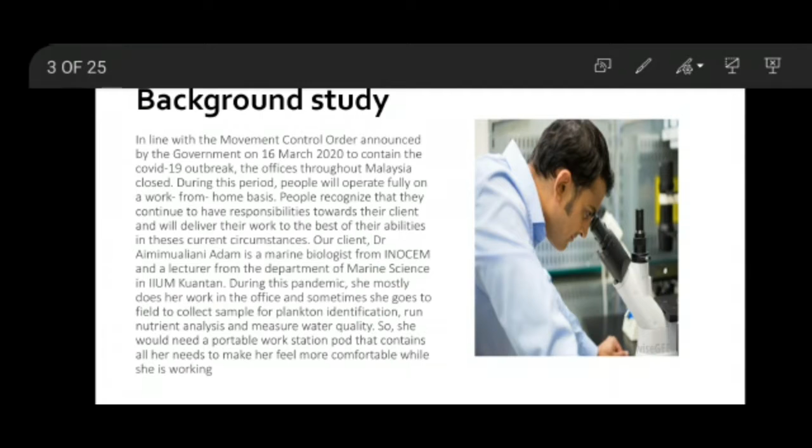In these current circumstances, our client, Dr. Aimimualiani Adam, who is a marine biologist from INOCEM and also a lecturer from the Department of Marine Science in IIUM Kuantan, has two types of workplace: one from home and the other on the field. On the field, she goes to collect samples for plankton identification, run nutrient analysis, and measure water quality. So she would need a portable workstation pod that contains all her needs to make her feel more comfortable while she is working.

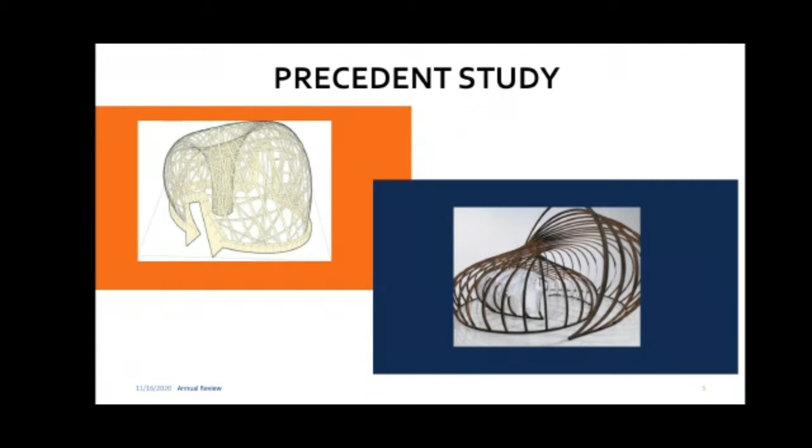Now let's dive into our pod design. For our precedent study, we chose this because the exterior is similar to our design, and for our case study, we chose this because the mechanism of our pod also needs to be portable. So we chose a caravan-like design that can also extend, like the one on the right.

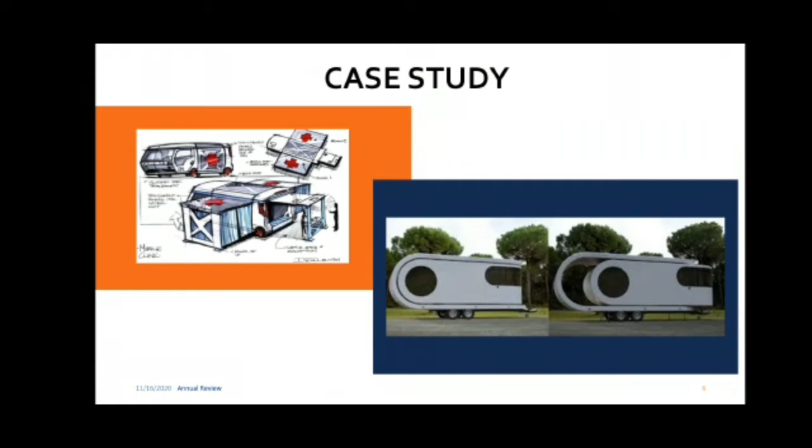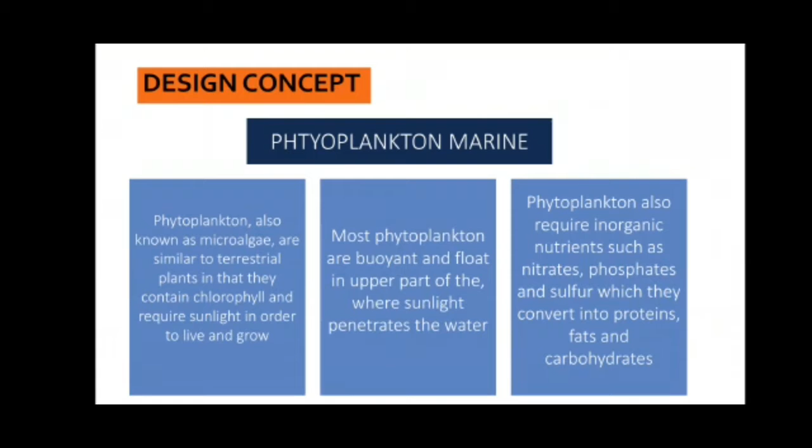Now moving on to our design concept, which is phytoplankton marine. Phytoplankton, also known as microalgae, are similar to terrestrial plants in that they contain chlorophyll and require sunlight in order to live and grow. Most phytoplankton are buoyant and float in the upper part of the water where sunlight penetrates. Phytoplankton also require inorganic nutrients such as nitrates, phosphates, and sulfur, which they convert into proteins, fats, and carbohydrates.

Moving on to the design development, we started off at the top right corner, very basic and geometric, and it slowly turns into a more round shape model.

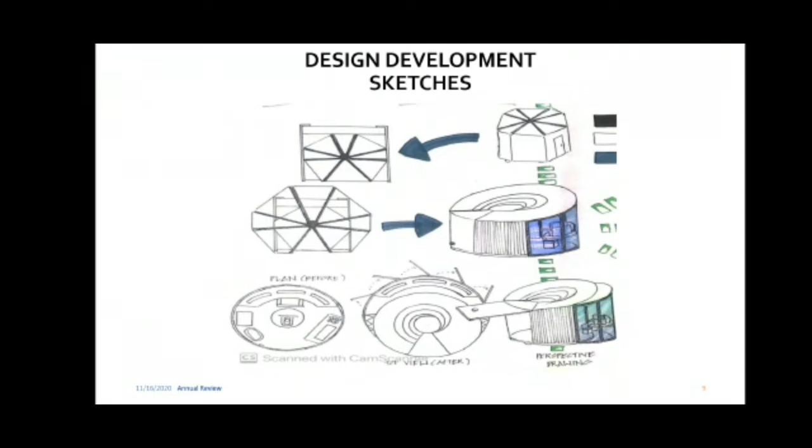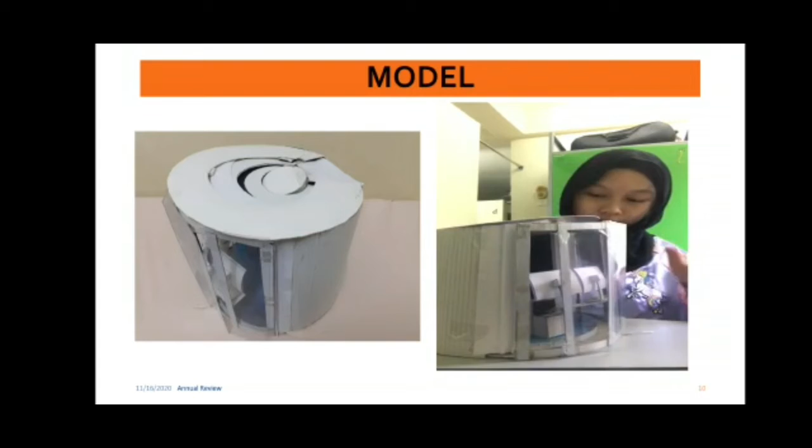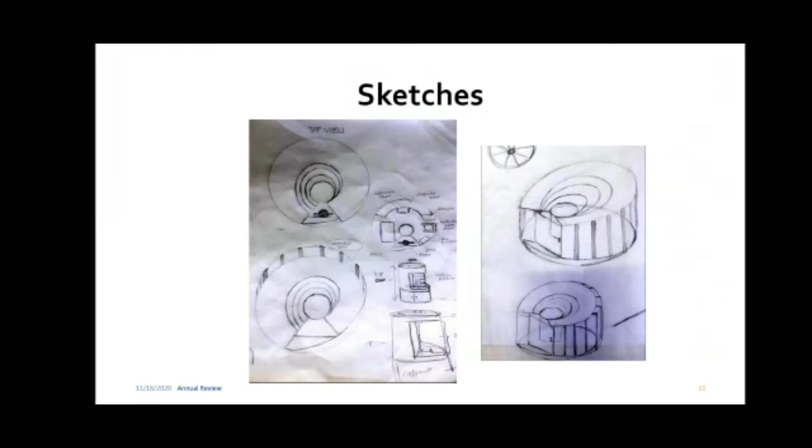So this is our model before we extend it, so we need to put this to extend like this. It will extend more to the front. And this is our sketches of our model caravan.

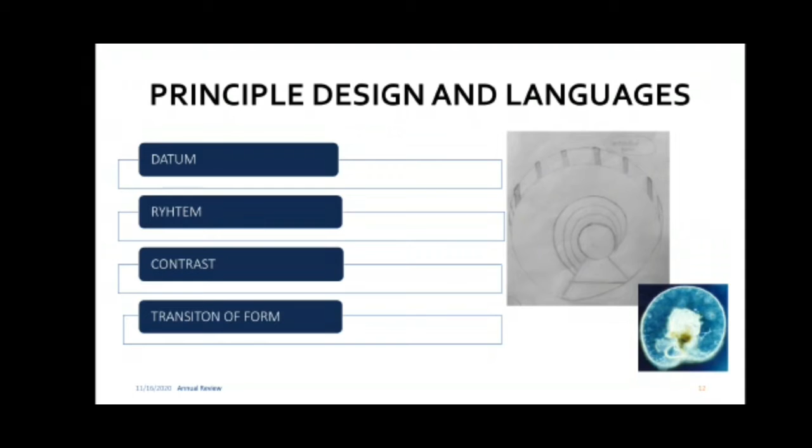For the principle design and languages, our design has datum, as you can see in the middle part of the design; rhythm, which can be seen from the curvy lines surrounding the circle in the middle; contrast, in which the concept uses the inspiration of one of the smallest creatures in the world but made it human-sized, a caravan; and transition of form, which is additive, as you can see when it extends forward.

And I will let Adriana continue with the presentation.

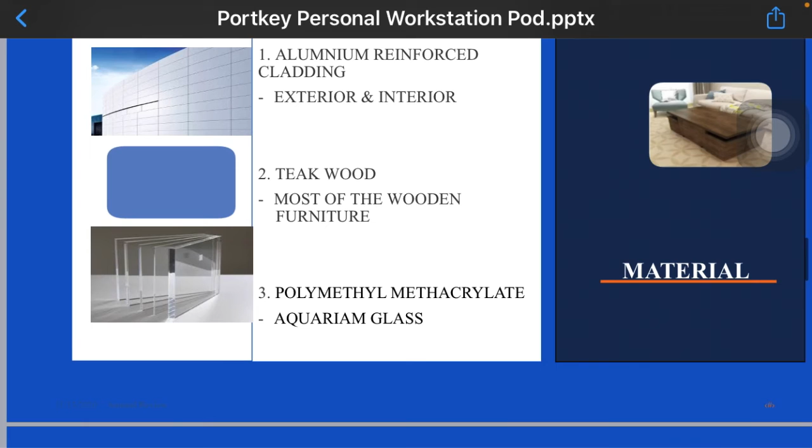So I will start with appliances and fittings. We use a recliner chair, air purifier, coat hanger, multi-screen monitors, foldable table, cat house, aquarium floor, coffee maker, and computer table. The material we use is aluminium reinforced cladding for the exterior and interior. Second, we use teak wood for most of the wooden furniture, and polymethyl methacrylate for the aquarium glass. The color scheme is navy blue, black, white, and sea green.

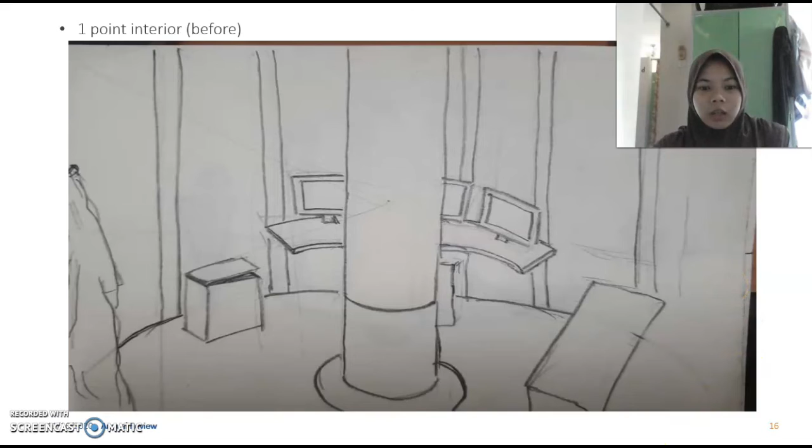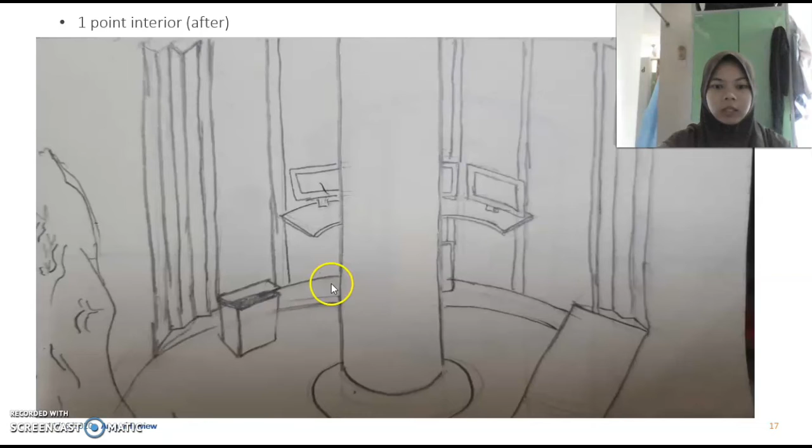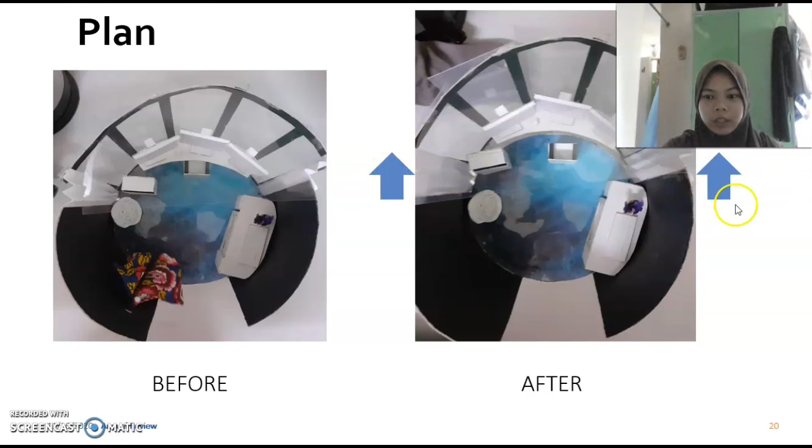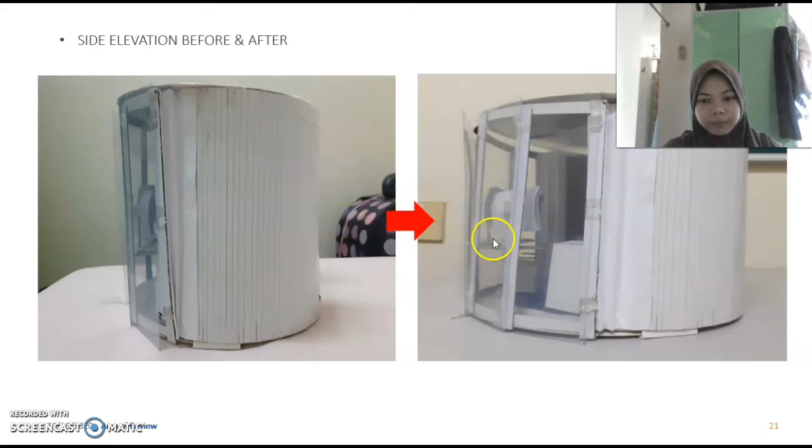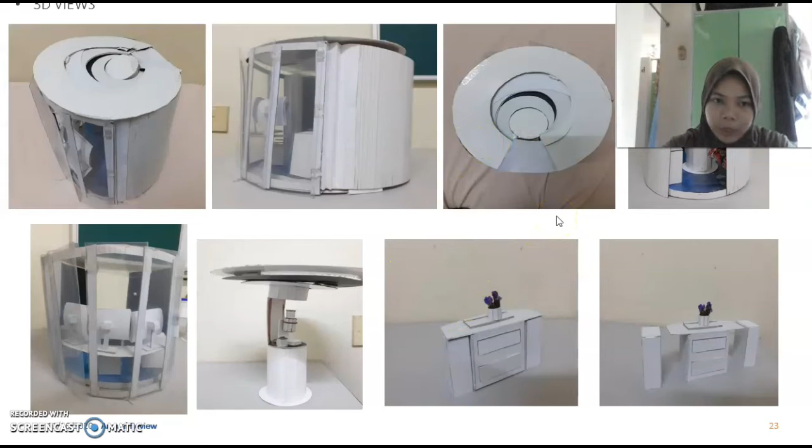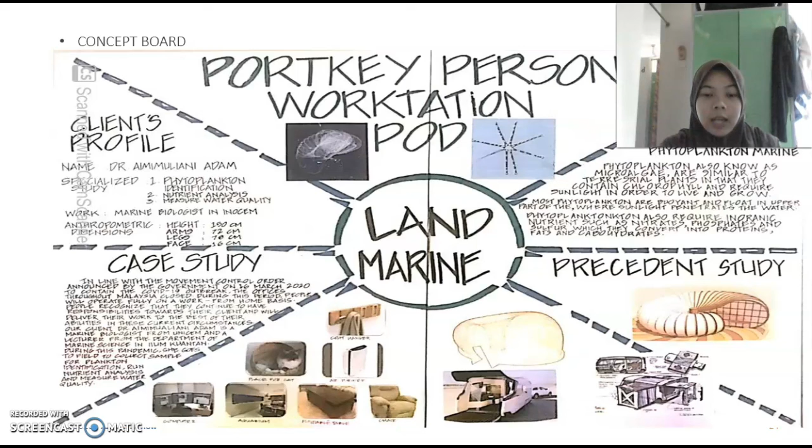Except the mechanic. The mechanic is an openable glass wall, so here is the glass wall, it can be opened, and it's also an extendable floor that we showed before, that it can be extended. So it's also a caravan-like portkey, because it was intentionally used for outdoor usage.